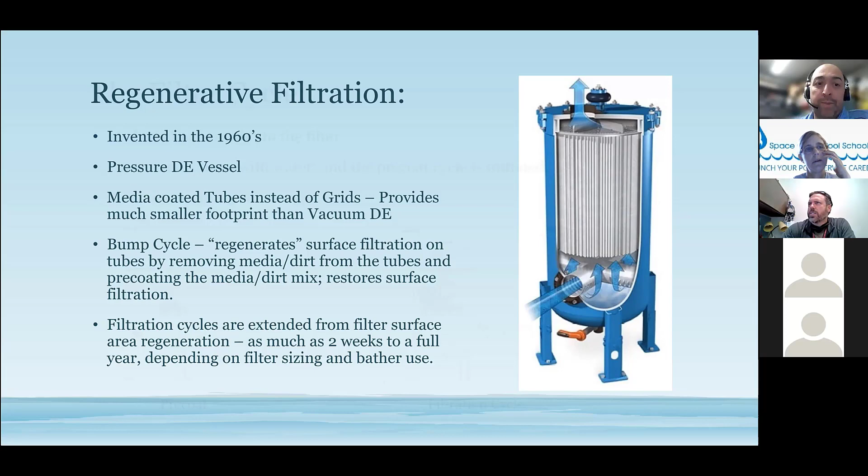To start the filter cycle, we start with an empty tank. We actually vacuum the media into the filter. It's not done like a pressure DE system where you have to have a container connected to the suction side. You actually vacuum it in, and then you start the pump. It fills with water.

Very important: you have to make sure you bleed out all the air out of the system, or else you're not going to have very good results. The last thing you want is for media to get into the pool. Bleeding out the system should be relatively easy. The instructions for whichever brand you have will tell you how to completely bleed the air out.

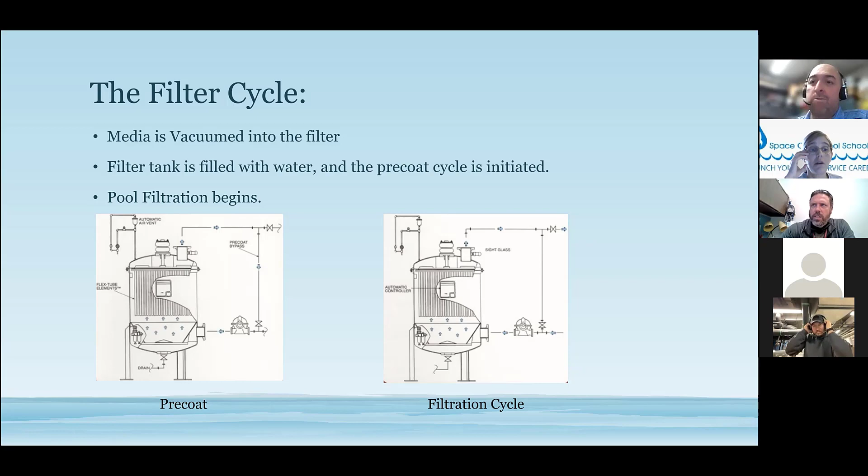Then there's the bump cycle. Most manufacturers use the once-a-day method, but originally it was set so that if you meet a certain pressure differential, usually anywhere from 12 to 15 psi, that's when the bump occurs. To be honest, I like the daily method because it really ensures that long filter cycle.

There are people out there that don't allow their Regen filter to bump automatically, so it's a good idea that when they hit that bump button, they do it during a slow period. I like to set my filters to nighttime, and if there's a problem, usually you'll get a call first thing in the morning. If you have 24/7 operations, they tend to know real quick if there's an issue, but 99% of the time it should be flawless.

What happens during a bump is the pump will stop, and then the system will activate via pneumatics. It'll activate this bump assembly, which is always inflated when in filter mode. It will suddenly evacuate the air and drop, and that drop will cause the media to loosen and come off. Then it floats in suspension and bumps several times—usually about 10—going down, then up, then down and up until the media is all loosened up.

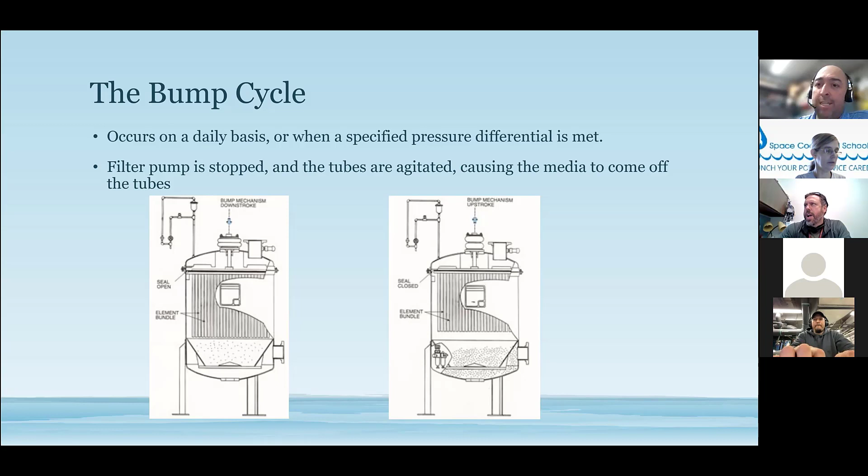Then it'll go into a pre-coat cycle again. The pump will start, the effluent valve will close, and the pre-coat valve will open, like I showed earlier, and it will recoat the tubes and then go back into filter mode.

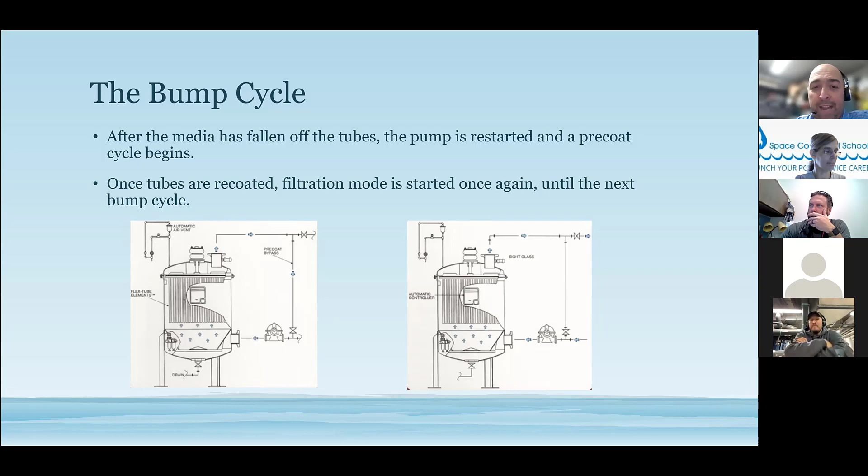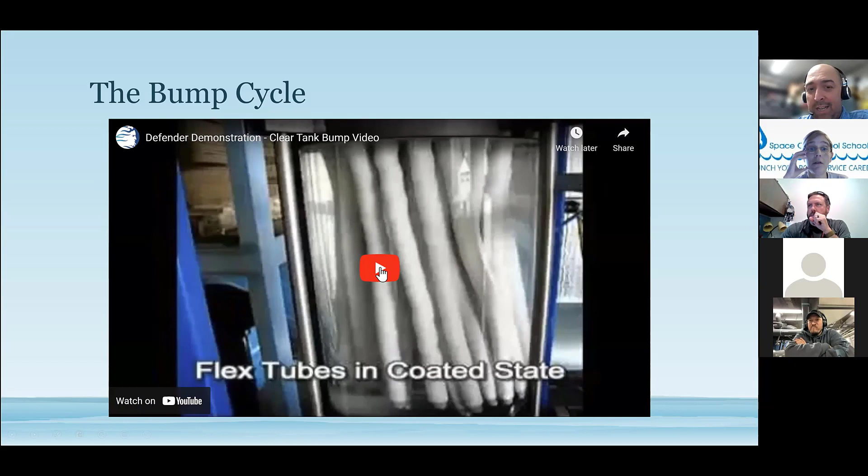So here's a little video from the archives of Neptune Benson. You can find this on YouTube, but this shows what a pre-coat looks like. In the early days, they had a test vessel, and this is what they showed. They even took this to some trade shows at one point, but this is what a bump cycle looks like inside a Regen filter.

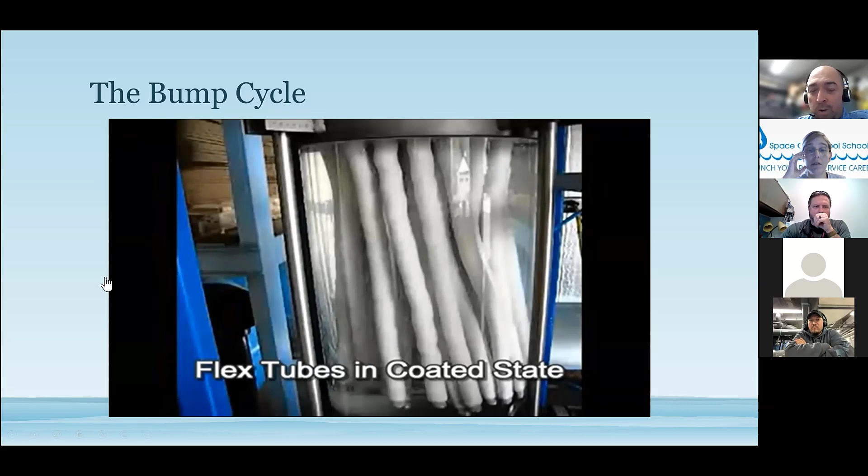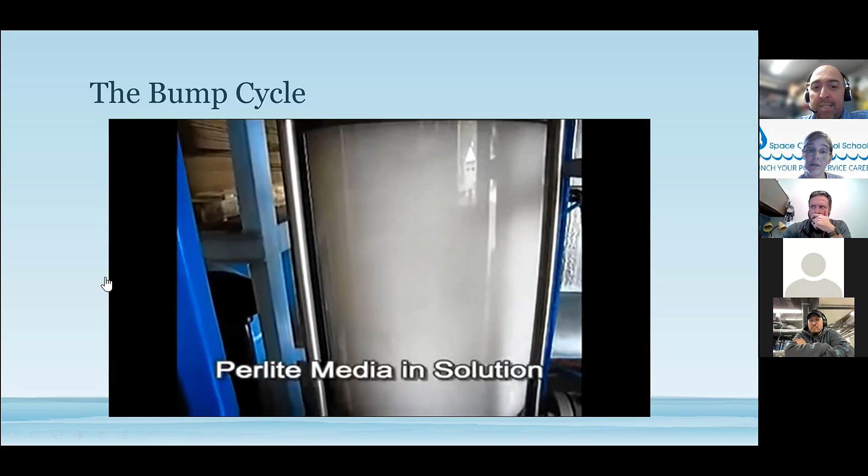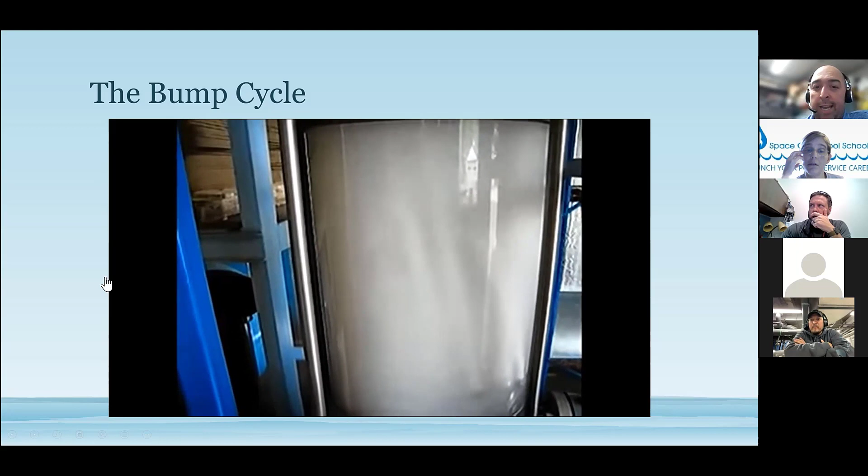So you have your flex tube in the coated state—this would be the filter cycle. That's a bump, and that's what happens to the tubes: it completely collapses, the perlite goes into solution, and in a couple of seconds you'll see the pre-coat cycle start. This is a small vessel, so it goes quick. You can already see the tubes—that means the perlite is coating—and then it skips to what it looks like again. At the end, you end up with fully coated tubes. Pretty simple idea.

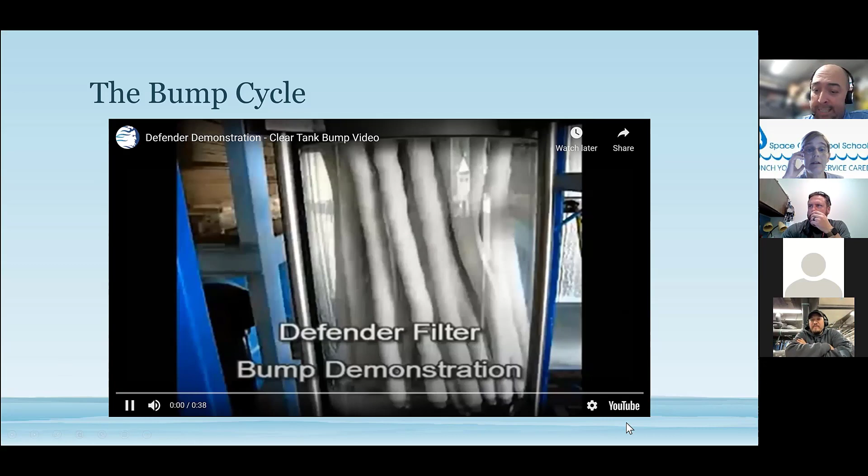So the benefits. Obviously, one of the biggest benefits is you have a small footprint, which means you'll have a smaller filter room design.

Longer filtration cycles, anywhere from 2 weeks to almost a year. I know a lot of summer pools, like water parks, are open seasonal. They can run one season off of one pre-coat.

There's no backwashing. So when you reach the point where your pressure differential doesn't change after a bump, it means it's time to change the media because it's saturated with dirt. You simply dump the contents of the tank, refill it. You might want to rinse, so you can refill it up to twice, and then start the system up again. Vacuum more media, fill the tank, run the pre-coat, and you're back in business.

So the only water you really use is the volume of the tank, not thousands of gallons like a sand filter does. When you do a cost analysis, you really start stretching that water bill because of that. And think about it too: less water loss means less chemicals, less heat needed. So it's actually a very efficient system.

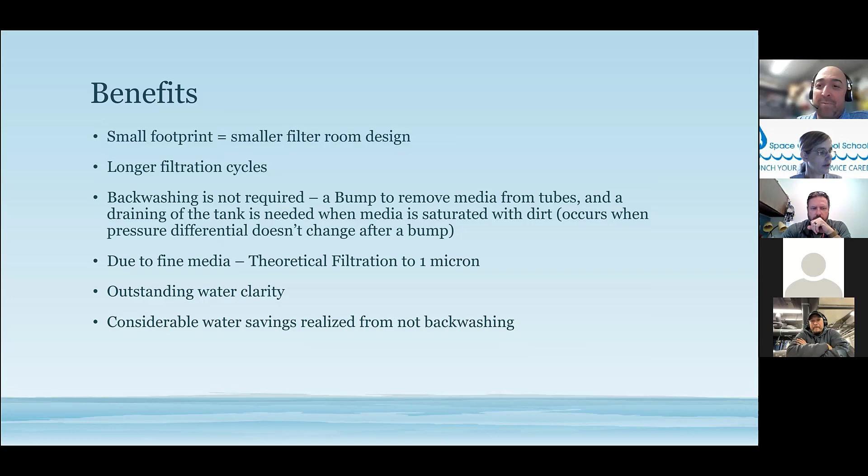So when I said outstanding water clarity, this is what I mean. This is a typical stroke clinic, and you can see clearly to the other end of the pool, and this is a really big pool. The fact that you can see the target lines on the other end is just a testament to the type of water clarity you will get from a regen filter.

I have yet to see certain sand filters that can make this claim. I know one sand filter company that does, but it's a hard, expensive filter. They use a really fine media, and even with that, the clarity's still not as good as that video.

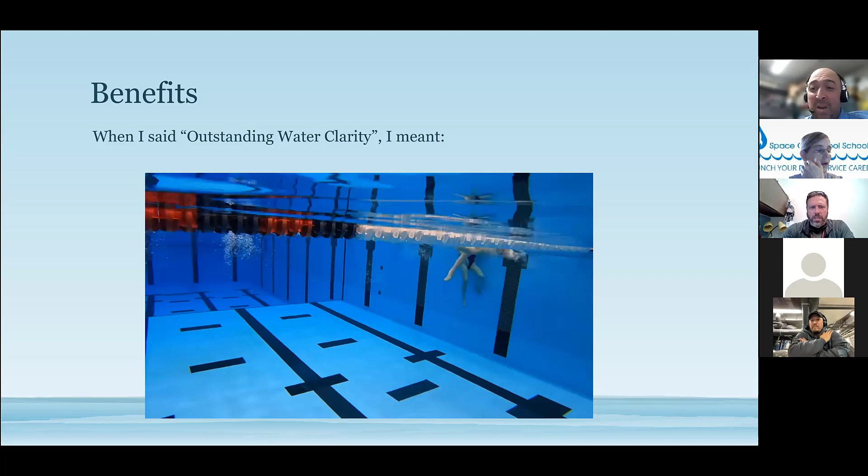I've gone around pools, and when I jump in, I put my goggles on and do a vision test across, and sometimes I'll take a picture of it. There's nothing like looking at a regen filter pool—the clarity is just amazing.

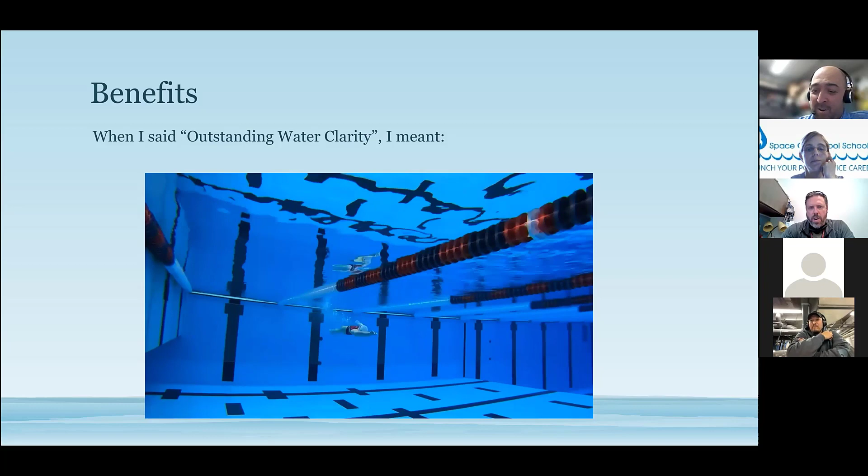So now for the cons. Obviously the easiest con is the fact that you have to reload external media from time to time. Nothing beats a sand filter in terms of that. Sand filters are permanent media—you don't have to replace it so often.

The cost for a regen filter is a higher initial capital cost, and there is some maintenance involved, not as much as a sand filter. You have pneumatic valves, a compressor, electronics that you have to deal with. To go into the 21st century, you've got to understand there is a higher initial cost, and the cost of ownership is also a little higher. But again, the benefits outweigh the cost to the owners out there.

Pools that have heavy oils and dirt will have reduced filter cycles, and these are aspects that have to be addressed in the design phase. I find a lot of places put in a regen filter, and then next thing you know they're complaining because certain things are happening. I mean, you put a regen filter in a pool that's right next to the ocean—these beach pools, I like to call them—and they get a lot of sand, and sand and media don't mix. So these are challenges that the end user usually ends up with.

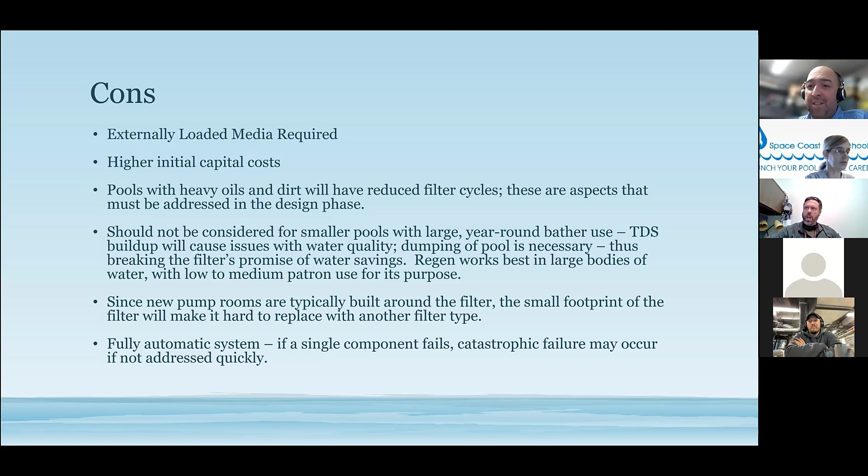So, considerations for selecting a regen filter if you're looking to put one in. First off, if you're a facility that's looking to make the switch, congratulations, you're making a very good choice. First thing you want to look at is the materials of construction.

Cast iron epoxy coated is one way you can get it. Stainless steel, and now they have a fiberglass option. There used to be one, but that company went by the wayside, and now there's a new company that offers fiberglass. You can still get these filters in a manual or automatic bump operation.

A manual bump is basically a lever on the top of the filter that you've got to manually bump. Most people don't get them, but you still find them around from time to time. You know what? It's worth the couple thousand dollar upgrade. It definitely is—go automatic.

Don't do anything else. Access to the filter internals—you do have to do something to the tubes from time to time, because if you get oil buildup, there is a time where you're going to have to literally get in there and hand wash with a hose. So I'll show you what some manufacturers have done for that. But that's a very important thing—you have to be able to get into the filter. Okay, the control panel.

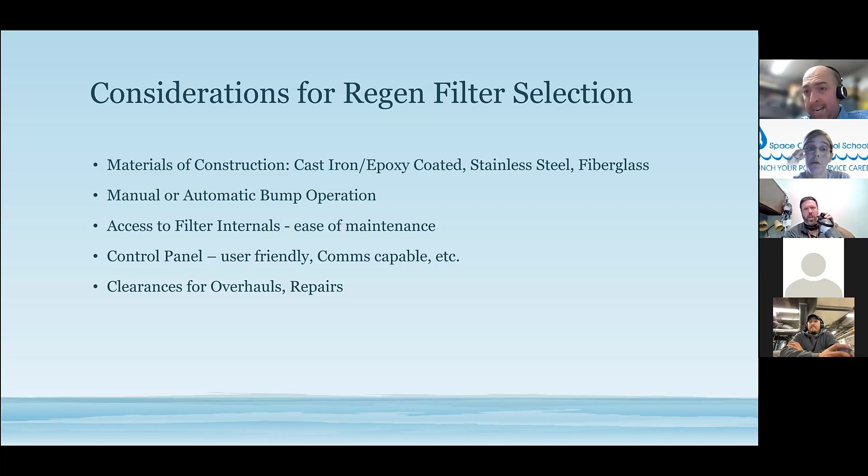So currently in the market, there are 4 players in North America that do regenerative filters. First from the left is the original regen filter. It's called, it's made by Filtrex. They currently have an OEM contract with Paddock Pools, so Paddock makes the tanks for them, and they're licensed to sell it as their own. I think it's called the Regenerator or something like that. But this is the original filter.

It's a stainless steel tank. They do spray on a coating over it, but it is stainless steel. Everything is very simple - the owner of the company wanted to keep things simple, so it's got a simple PLC controller on it. It actually reads the flow rate, so it comes with a flow meter when you buy it. You have your influent and effluent pressure gauges, your pump mechanism is here. They use a blower system instead of a vacuum, so it's really like an industrial built system, and like I said, it's the original.

Second is the Defender, made by Neptune Benson. The Neptune Benson Defender came out around the late 90s, and it is the number one regenerative filter out there. Just a reminder, it's a cast iron tank with a Flexol system for the interior, so it's got a coating in it. A lot of people, there's pros and cons to that, but it keeps the cost down. Stainless steel is very expensive. Not to mean it doesn't mean you can't be competitive, because I know for a time in some areas Filtrex beat out Neptune Benson in some bids.

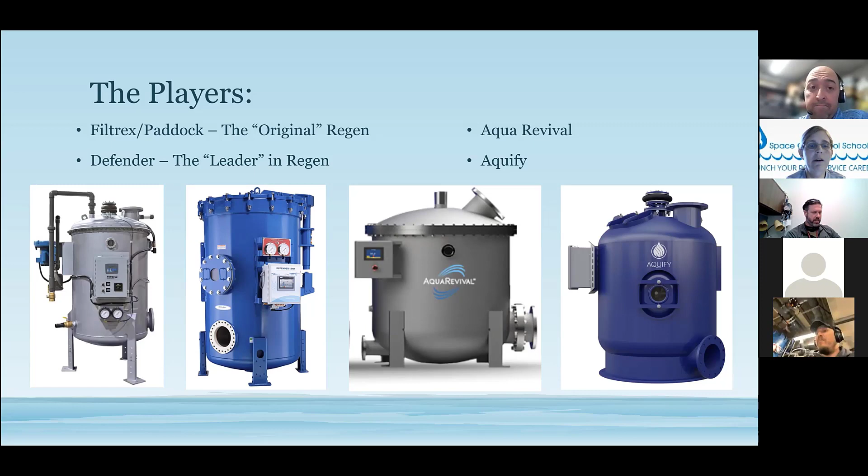All right, and that's really all there is to it. We've reached the end of the presentation, and I'm ready to take questions from anybody.